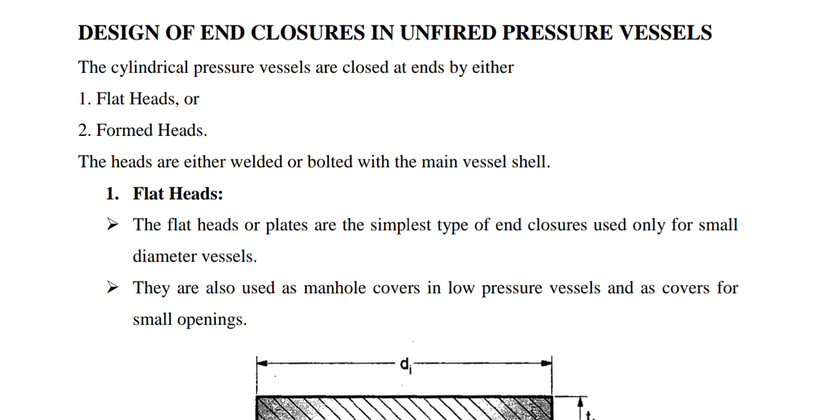The cylindrical pressure vessels are mainly closed by two types of heads. The first one is flat head or second form head, out of which flat heads or plates are the simplest type of end closures, used only for small diameter vessels. They are also used as manhole covers in low pressure vessels and as covers for small openings.

Here you can observe in this sketch, di is the inner diameter of the pressure vessel shell, and th is the thickness of the flat head. This is the simple flat plate which is used as end cover for the pressure vessel shell.

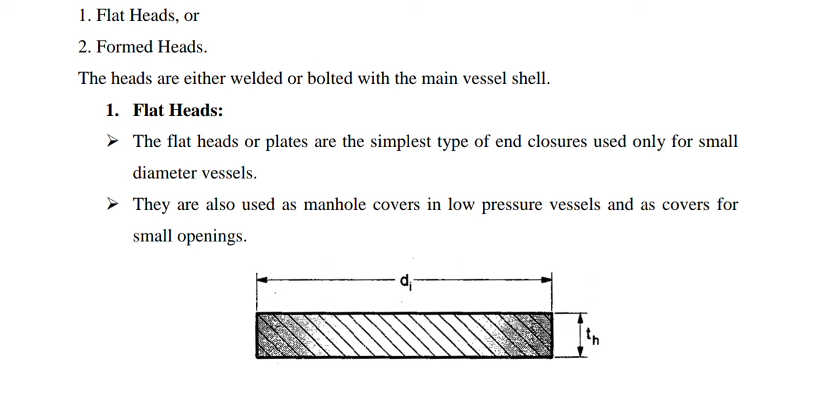The thickness is calculated by 0.7 times di square root of pi upon sigma all, plus c, where di is inner diameter, pi is inner pressure or design pressure, sigma all is the allowable tensile stress for the selected material in newton per mm square, and c is corrosion allowance in mm. With this we can calculate the thickness of the flat head.

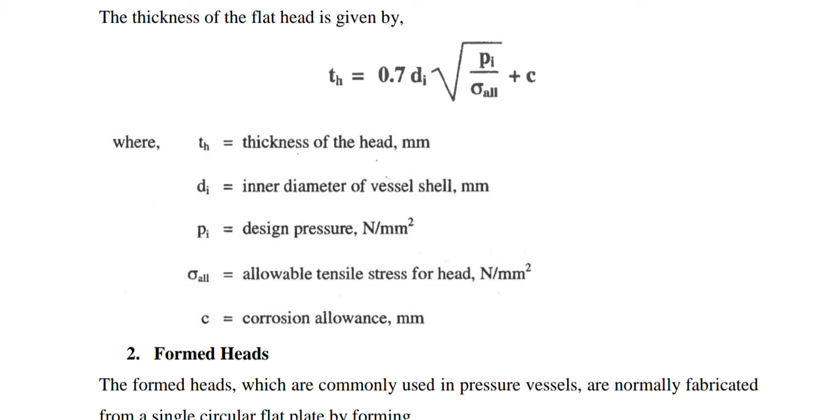Now form head, the second type of head which is used to close the pressure vessel shell. As its name indicates, these heads are manufactured by the process of forming. Again there are five different types of form head.

First one is plain form head, second one is torispherical dished head, third is semi elliptical dished head, fourth is hemispherical head, and fifth one is conical head.

The form heads which are commonly used in pressure vessels are normally fabricated from a single circular plate by the forming process.

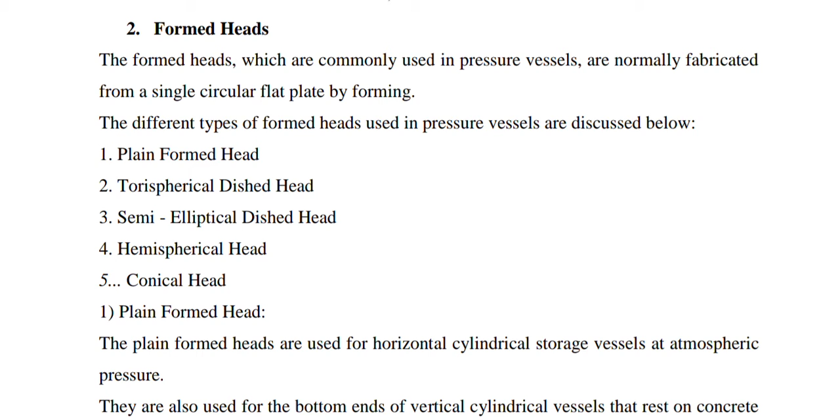Now we will discuss the first one, plain form head.

The plain form heads are used for horizontal cylindrical storage vessels at atmospheric pressure. These are used where pressure is atmospheric pressure. They are also used for the bottom ends of vertical cylindrical vessels that rest on a concrete slab and do not have diameters in excess of 7 meters. That means they can also be used for vertical cylindrical vessels, but the condition is they rest on a concrete slab and do not have diameter more than 7 meters.

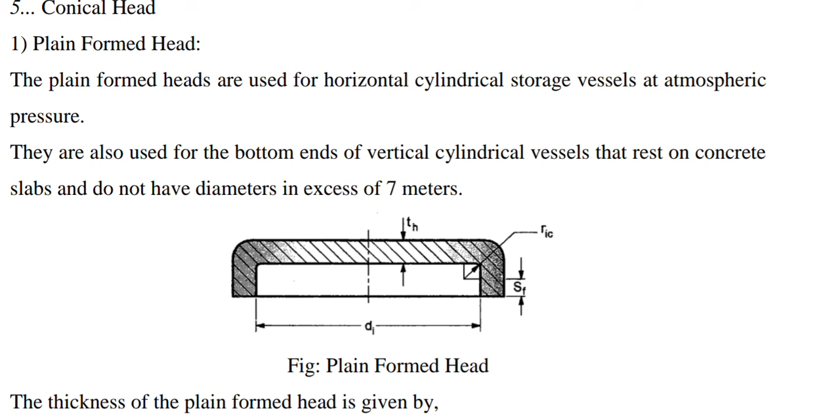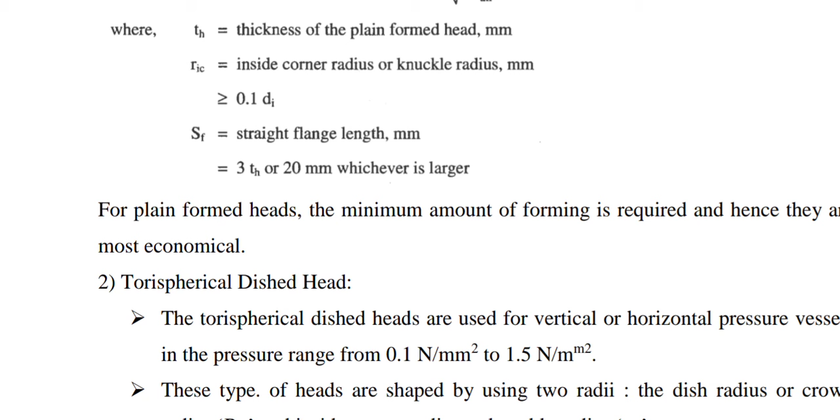The various parameters for plain form head are th, the thickness of the head, di inner diameter, sf, the straight flange height or length, and ric, the inside corner radius or knuckle radius. So we have sf straight flange length, di inner diameter, and ric, the knuckle radius or inside corner radius.

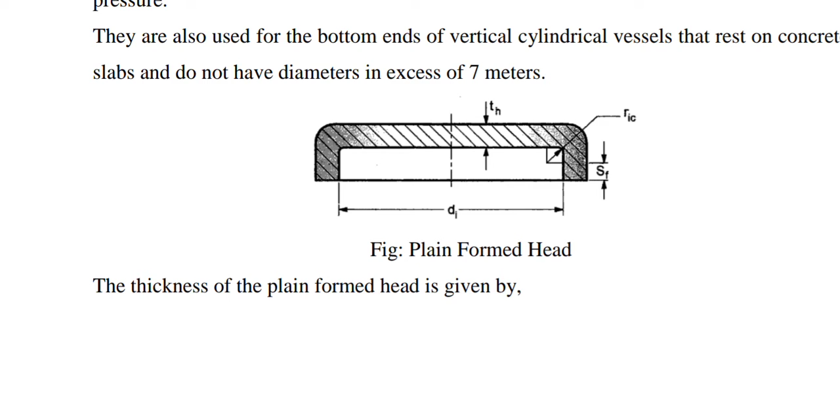Now how to calculate thickness? It is given by the relation 0.4 times di square root of pi upon sigma all plus c. Again, di is inner diameter, pi is design pressure, sigma all is allowable stress, and c is the corrosion allowance.

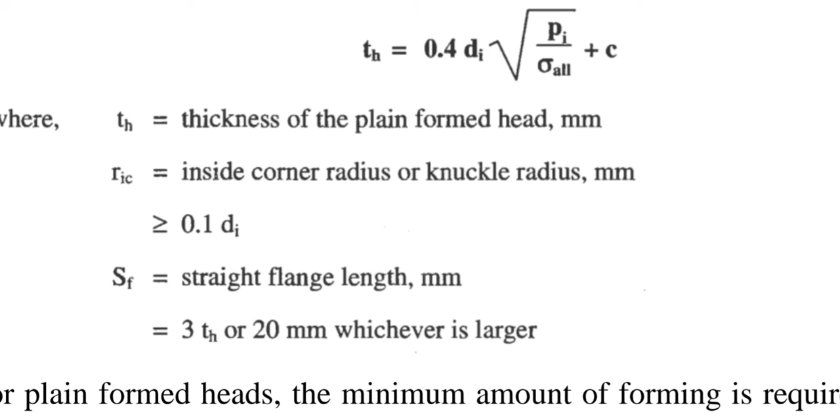Inside corner radius or knuckle radius is greater than or equal to 0.1 times di, where sf is generally taken as 20 or 3 times the thickness of the head, and whichever value is larger is considered as the sf value.

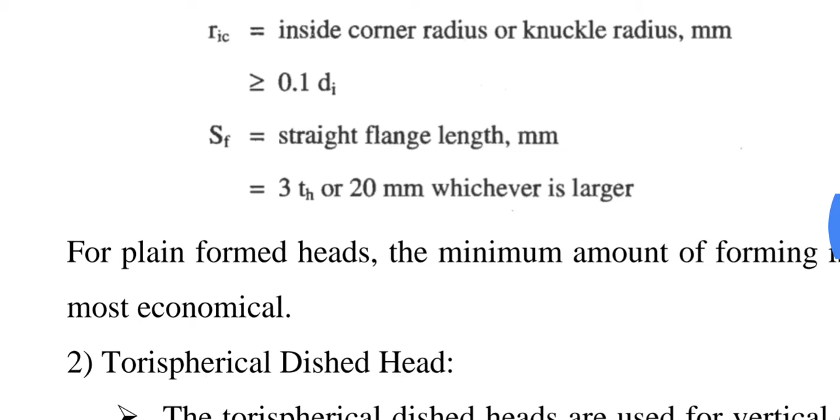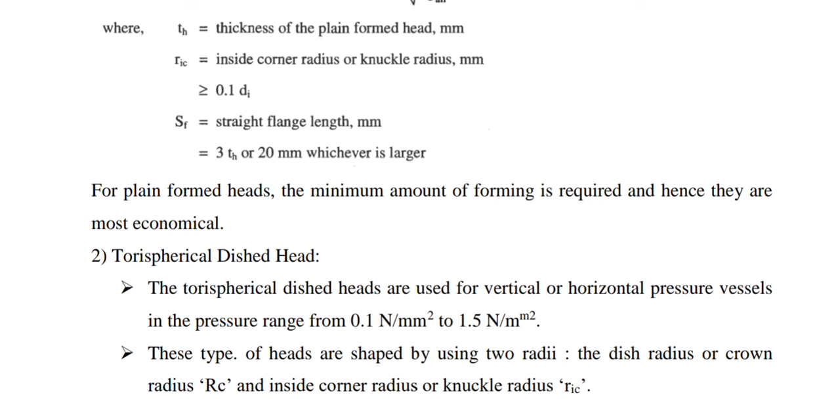There is one advantage of plain form heads: minimum amount of forming is required, and hence they are the most economical out of all five types of forming heads.

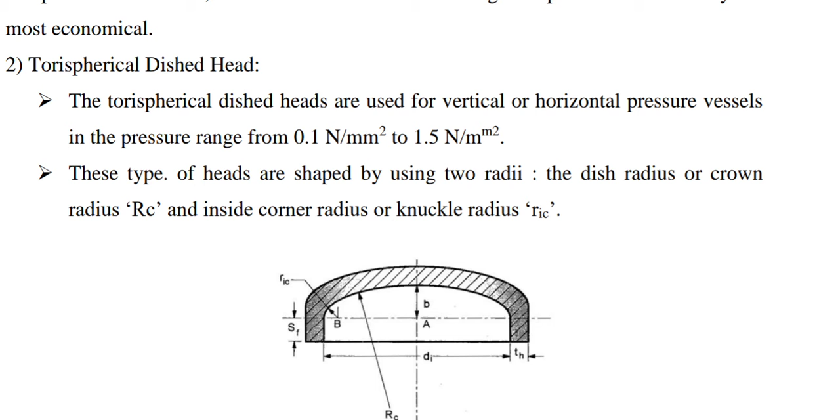Now the second one is torispherical dished head. These are used for vertical or horizontal pressure vessels in the pressure range from 0.1 newton per mm square to 1.5 newton per mm square. These types of heads are shaped using two radii: the dish radius or crown radius, noted by capital RC, and the inside corner radius or knuckle radius.

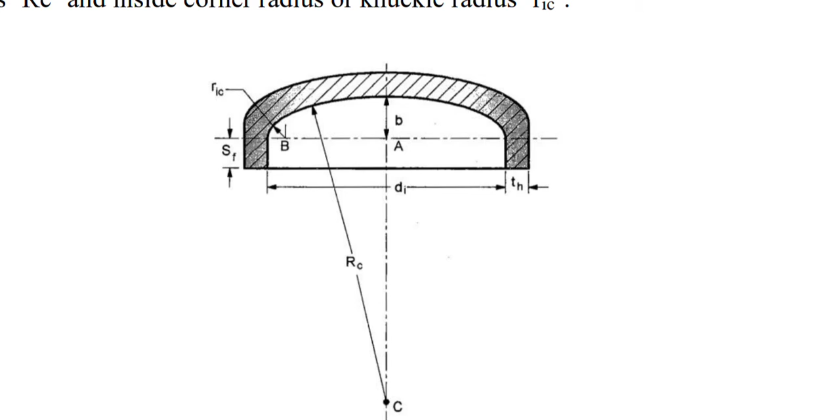Here you can observe RC, capital RC, and inside corner radius, small RIC. Again, DI is inner diameter of the pressure vessel shell, TH is the thickness, and SF is the straight flange height or length.

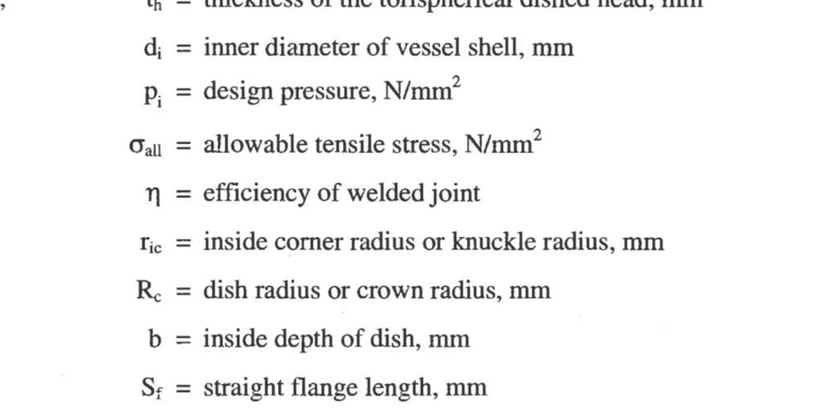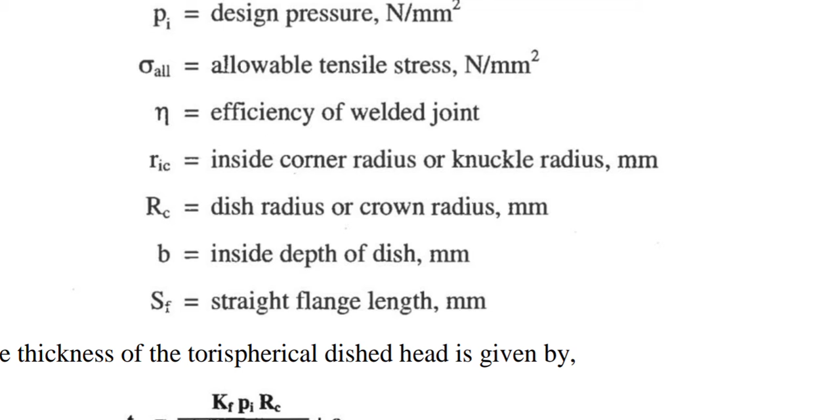TH is thickness of the torispherical dished head, DI is inner diameter, PI is design pressure, sigma all is allowable tensile stress for that material, Eta is efficiency of the welded joint, RIC is the inside corner radius or knuckle radius, RC is the new parameter for this head, the dish radius or crown radius, and B is the inside depth of dish, noted as small b. SF is the straight flange length, in mm.

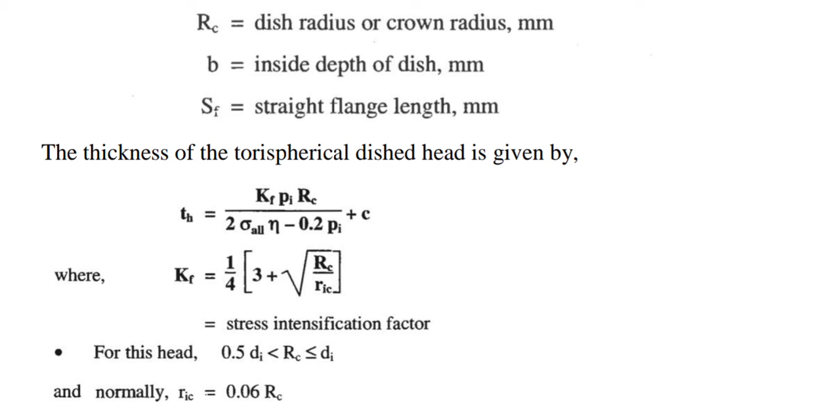Now the thickness of the torispherical dish head is given by Th equals Kf pi Rc upon 2 sigma all neta minus 0.2 times pi, plus c. The basic formula for thickness of a cylindrical vessel shell is T equals pi di upon 2 times sigma all neta minus pi, plus c.

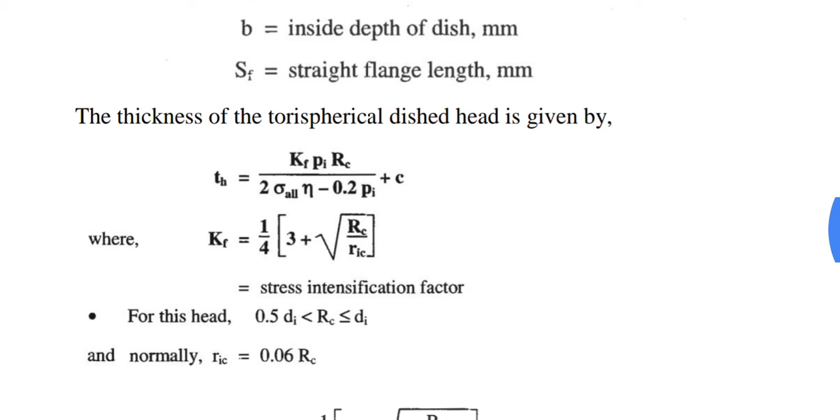Here some parameters are added, that is kf and rc, the new parameters, where the stress intensification factor kf is generally taken as 1.77.

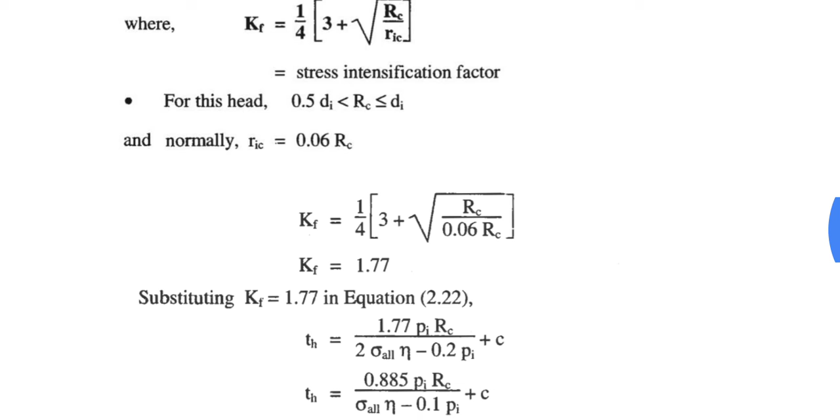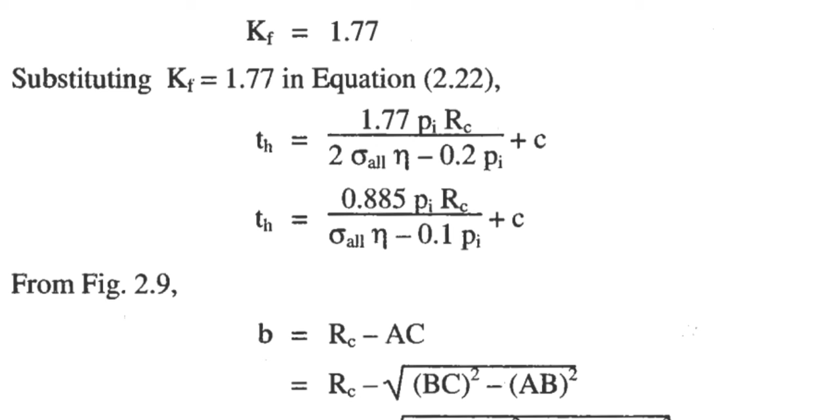If we put that value in this equation, kf equals 1.77, then we have the thickness of the torispherical dish head given as 0.885 pi rc upon sigma all neta minus 0.1 pi, plus c. That is the equation to calculate the thickness of the torispherical dish type head.

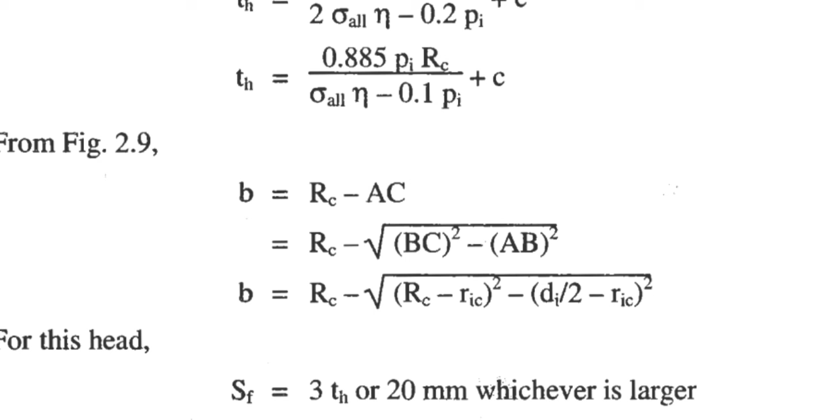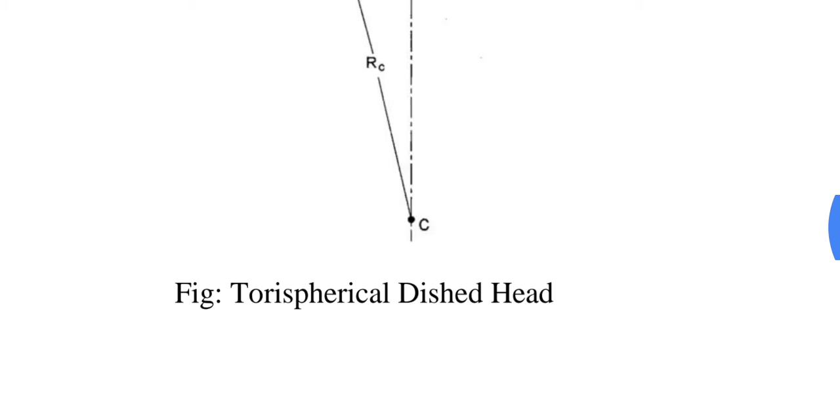The depth of dish can be calculated by RC minus AC. This comes from the sketch or geometry value, that is RC (radius of crown) minus AC, and AC can be calculated with the triangle square root BC square minus AB square. We have the values of BC and AB, that is RC minus RIC and DI by 2 minus RIC respectively.

For this head, SF value is generally taken as 20 or 3 times the thickness of head, whichever is the larger value, it is considered as SF value.

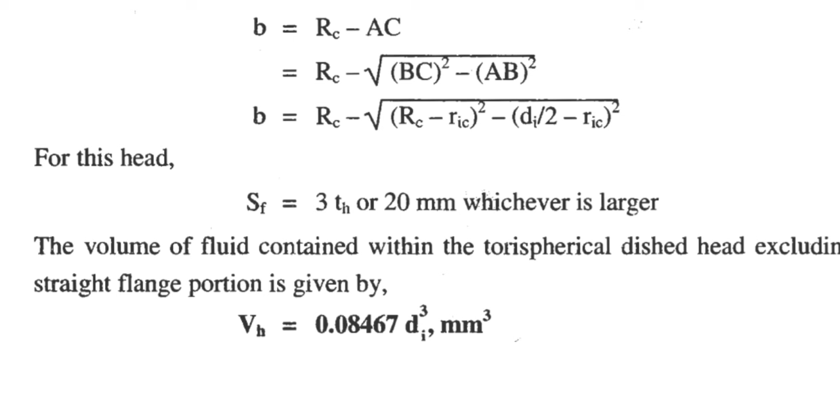Due to the dish type structure, the volume of that pressure vessel shell is increased, and that excess volume without the straight flange is considered as Vh equal to 0.08467 times di cube, the volume of fluid contained within the torispherical dish head, excluding the straight flange portion, because of its orientation or forming dish shape. This is the excess volume.

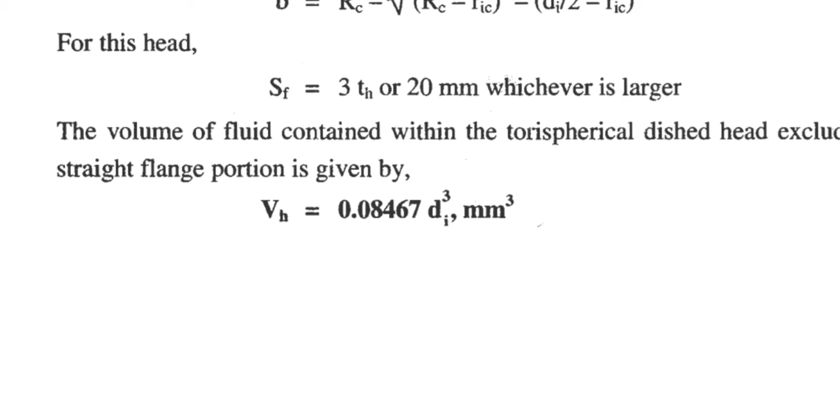The disadvantage of this head is: the main drawback of torispherical dish head is the local stresses at the two discontinuities, the junction between the crown radius and the knuckle radius, and the junction between the knuckle radius and straight flange, which causes discontinuities, resulting in local stress generation.

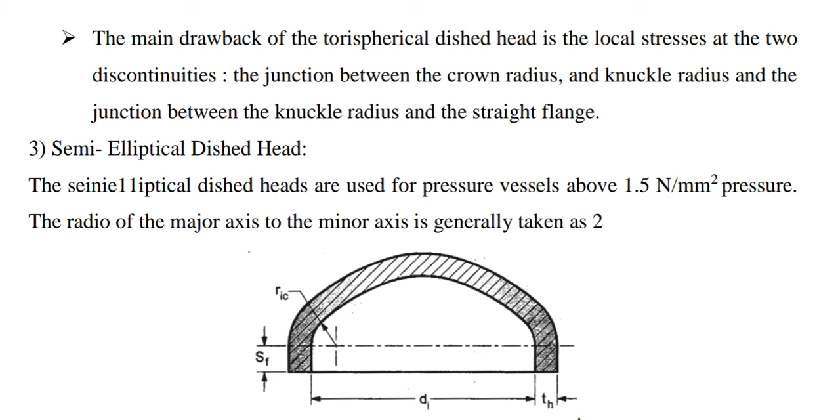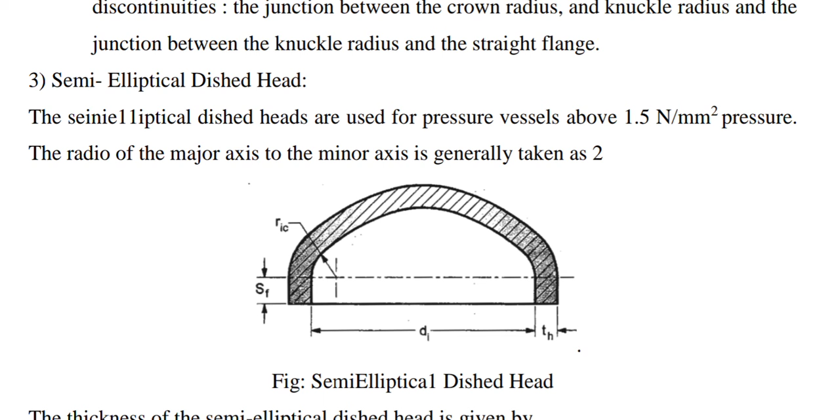The third form head is semi-elliptical dish head. Semi-elliptical dish heads are used for pressure vessels with pressure above 1.5 Newton per mm square. The ratio for this elliptical shape, major axis to minor axis, is generally taken as 2. Here you can observe the sketch of semi-elliptical dish head.

RIC is inner corner radius, DI is inner diameter of pressure vessel shell, TH is the thickness of that head, SF again is straight flange length.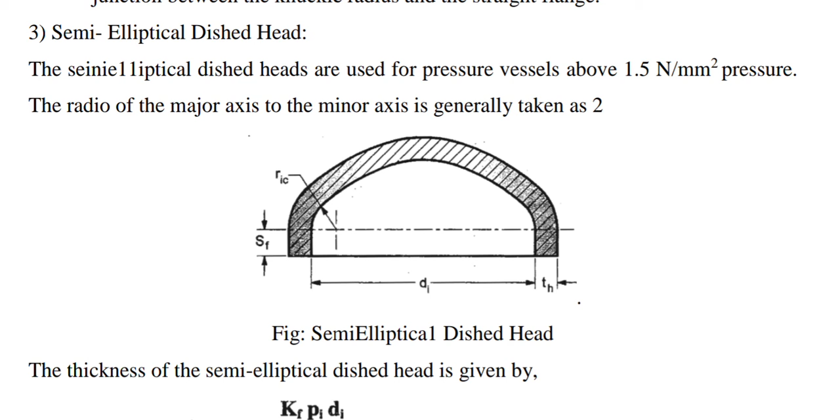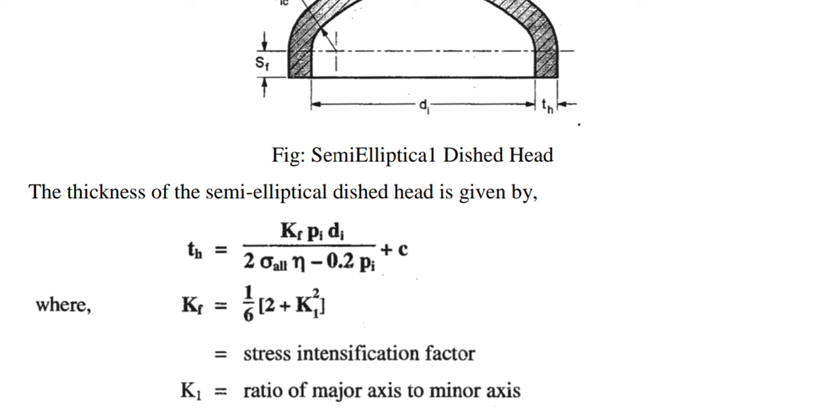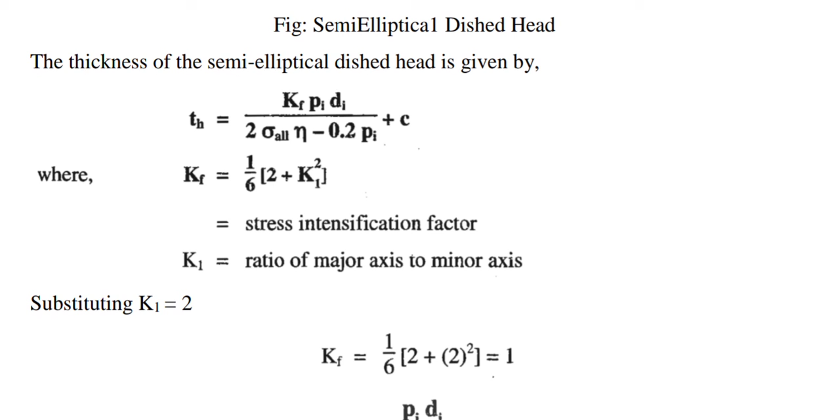The equation to calculate thickness is Kf times Pi di upon 2 times sigma all eta minus 0.2 times Pi, plus C, where Kf is stress intensification factor, calculated by 1 upon 6 times bracket 2 plus K1 square, where K1 is the ratio of major axis to minor axis, and as discussed it is generally 2. So if we put this value, then we have Kf equal to 1.

So the thickness is given as Pi di upon 2 times sigma all eta minus 0.2 times Pi, plus C.

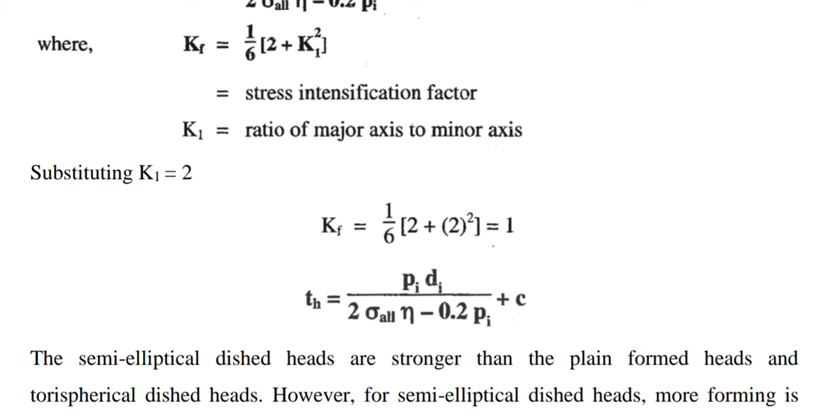The main advantage of this semi-elliptical dish head is they are stronger than the plain form head and torispherical dish heads. However, for semi-elliptical dish head, more forming is required, hence the cost of forming is more as compared to plain form head and torispherical dish head.

Again, because of this semi-elliptical shape, more fluid is contained, and that volume within the head is given as Vh equal to 0.131 di cube.

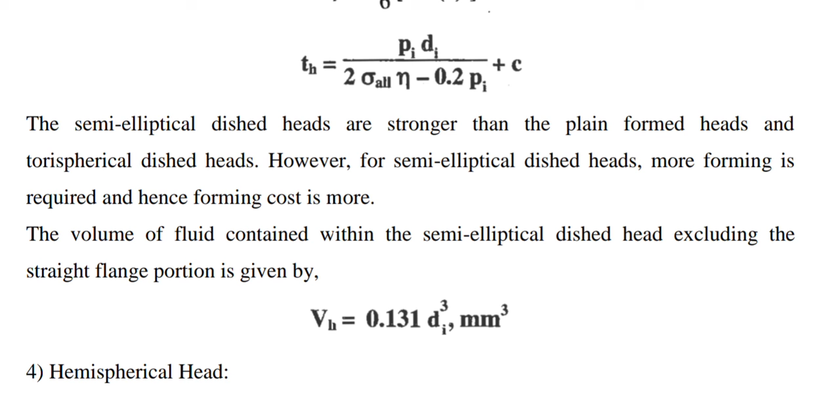The fourth one is hemispherical head. Here you can observe the sketch of hemispherical head. Hemispherical heads are the strongest of all the form heads. They are free from discontinuities and hence used in high pressure vessels. There is no discontinuity in hemispherical head, so the strength is more. We can say that they are the strongest as compared to others.

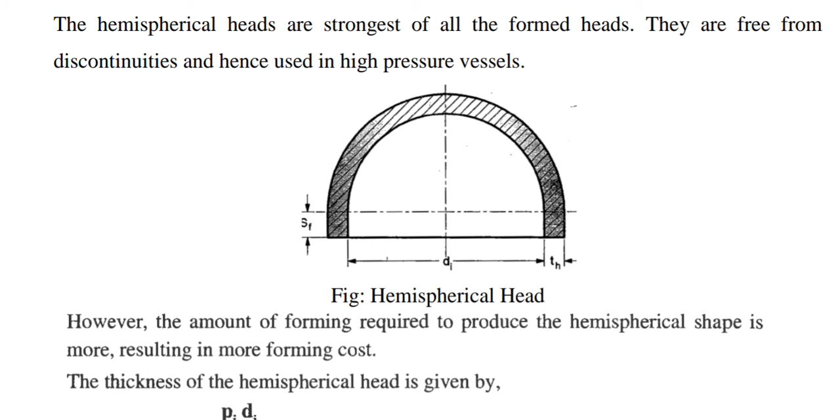But as far as forming or manufacturing process is concerned, the amount of forming required to produce the hemispherical shape is more. It results into more forming cost, and its thickness is calculated by the equation Pi di upon 4 times sigma all eta minus 0.4 times Pi, plus C.

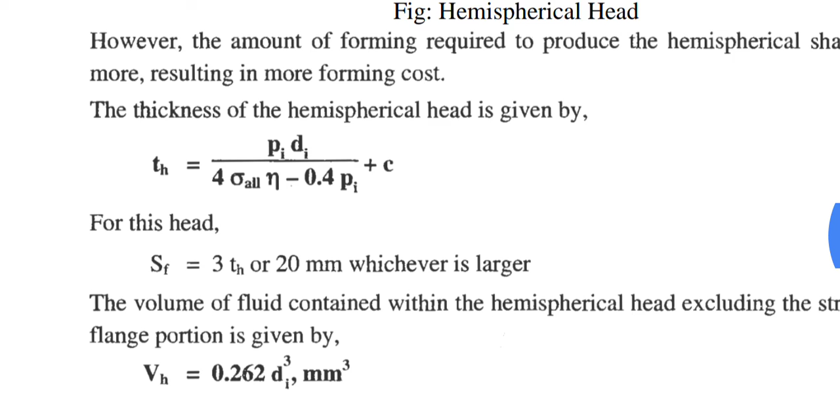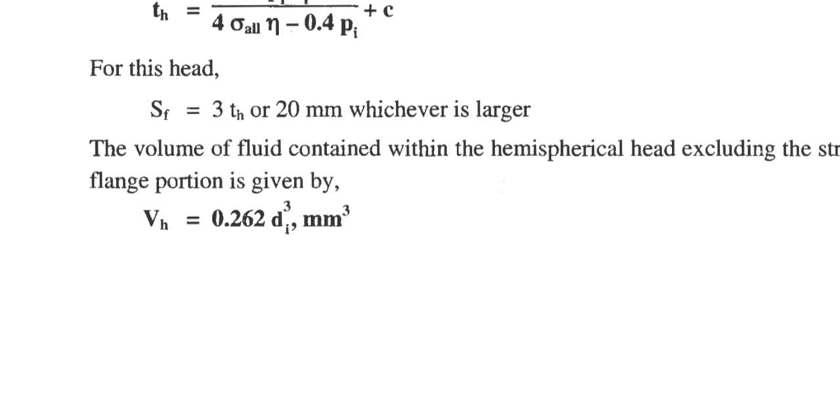SF value is again 3 times TH or 20, whichever is more, is considered as SF value. The volume of fluid contained in hemispherical head, excluding the SF portion, is 0.262 di cube.

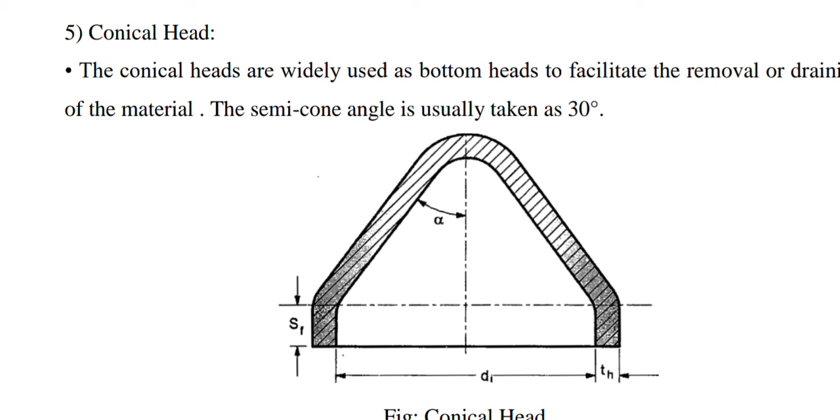The last one is conical head. Conical heads are widely used as bottom heads to facilitate the removal or draining of material. The semi-cone angle is generally taken as 30 degrees. These heads are generally used at the bottom because they can facilitate removal of fluid by using a drain, so that fluid can be easily removed.

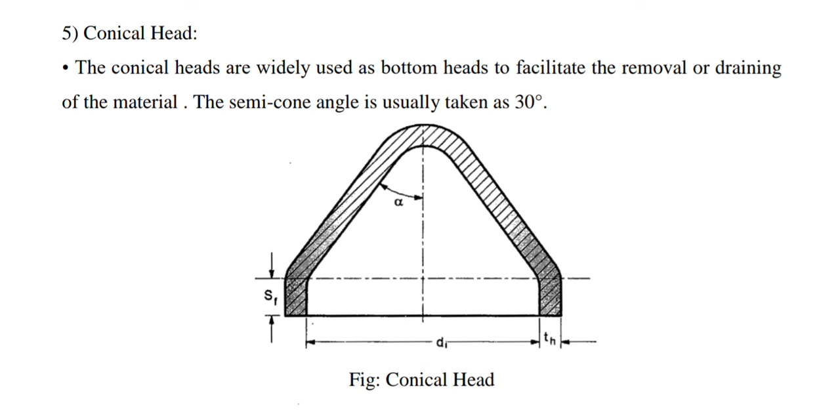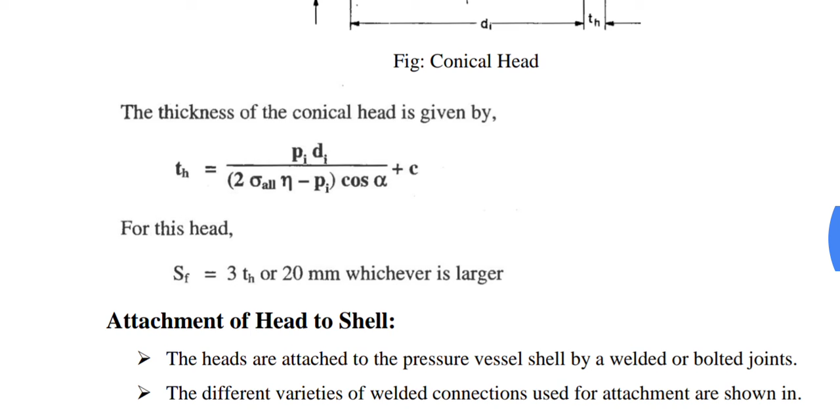The semicone angle is usually taken as 30 degrees. The thickness is Pi di upon bracket 2 times sigma all eta minus Pi cos alpha, plus C, where alpha is the semicone angle, generally taken as 30. SF value is 3 times TH or 20 mm.

In this way, we have discussed 5 different types of form heads. First one is flat form head, then second one plane form head, then torispherical dish head, third one is semi-elliptical dish head, fourth one is hemispherical head, and fifth one is conical head.